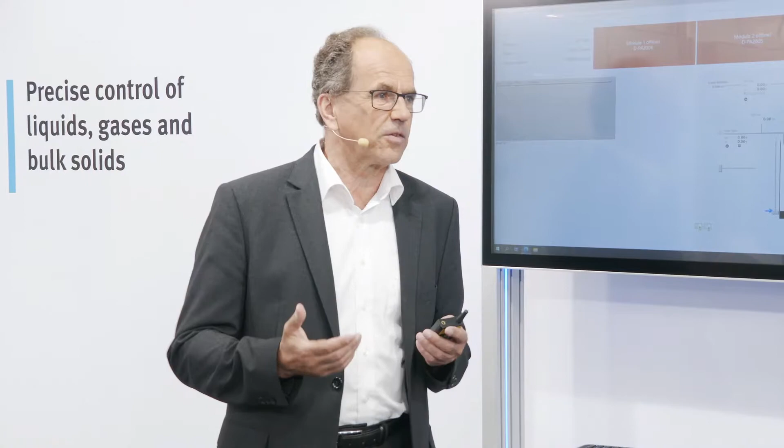Hello, Doro. A very important topic that we will talk about in the next 30 minutes, right? Yes, of course. What did you prepare? Just look at the discussion we have before the election here in Germany. You can see that this is an important topic: how to come to a climate-neutral living, let's say, to save our planet. Yes, very important topic. And we all have to take part. We all have to take action. Of course. We can't say the other one should do this. We all have to start at ourselves.

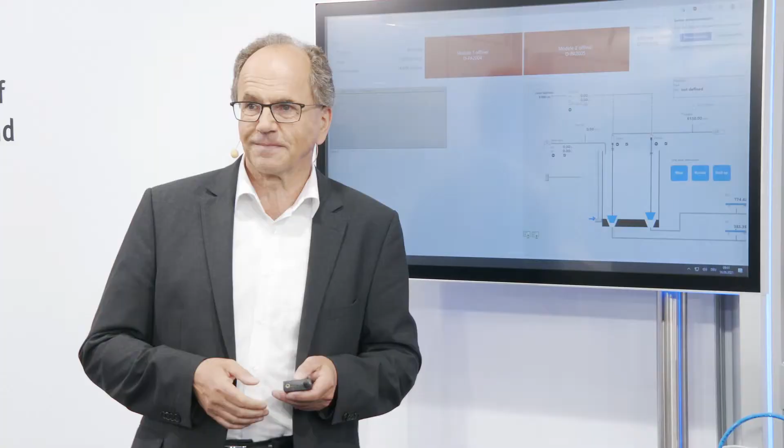So okay, let's go. Thank you for the kind introduction, Doro, and I would also like to welcome you to my presentation about climate-neutral production and what kind of benefits digitalization as well as automation can give on the road to this kind of production. But before I start, let's just have a look where we are. You see here statistics. You don't have to go into the details.

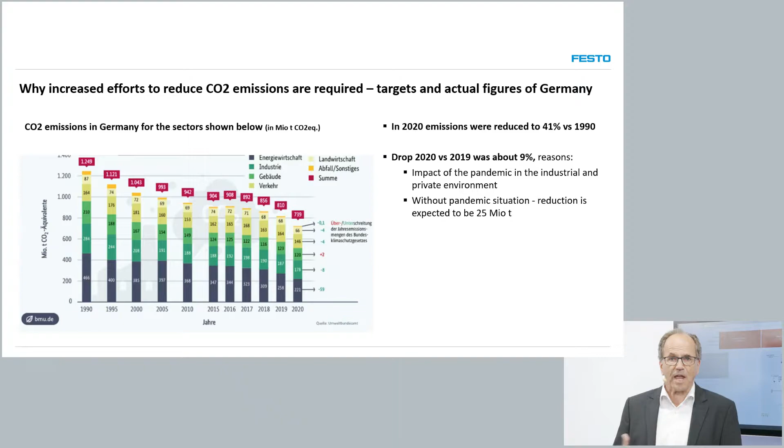The statistics about the climate-neutral, let's say, savings achieved from 1990 to 2020. This is a chart for Germany and an official chart from the Umweltbundesamt. The good news is that we achieved our targets last year. The bad news is that 9% of the reduction just comes from the year 2020. This means this is not really a sustainable reduction of CO2. And this leads to a change in the target setting.

I think you are very well aware that the European Union already strengthened the target for reduction to 2030 from -40% to -55%. And the German government also gave this target to the society, to come down from -55 in this case to -65%. Now you can say, okay, this is number crunching, but what is behind this? This means that from last year, 2020, to 2030, we have to reduce the CO2 emissions in the related sectors by 40%. So it's a huge amount for the industry, but also for energy production, for buildings and so on.

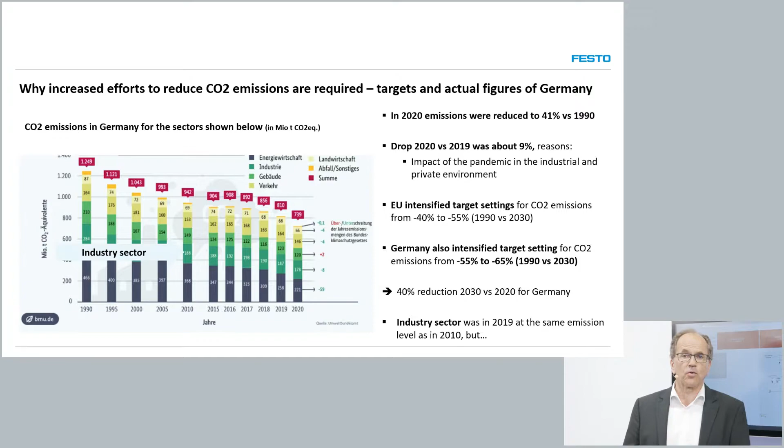And if you look at the industry sector, it was not so strong in reducing the CO2 emissions from 1990 to last year, especially from 2010 to 2019. As you can see here on the screen, there was nearly no reduction in the CO2 emissions. So we have to improve the situation, because the industry also has to contribute to this.

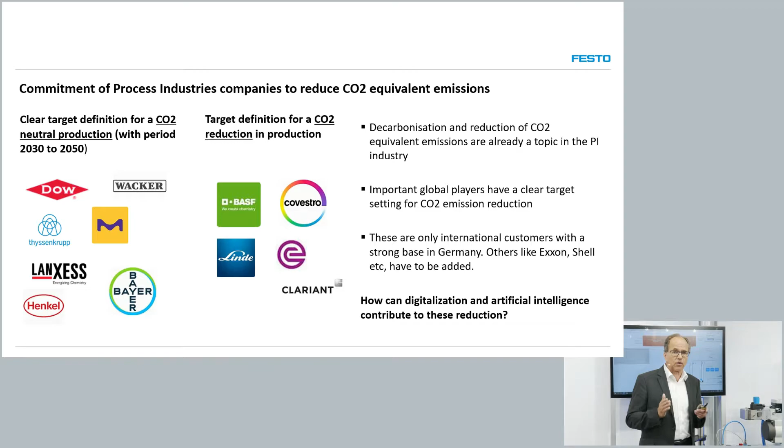And the good news is that a lot of companies, and I show a few examples on the left side of the slide, like Bayer, Dow, Merck, for example, already defined a year when they want to have a climate-neutral production within the period to 2050. Bayer, for example, announced 2030 as the year they want to have a climate-neutral production. The other companies mentioned here already have target settings for at least a certain percentage reduction in a certain predefined period. So we are on a good way looking at the industries.

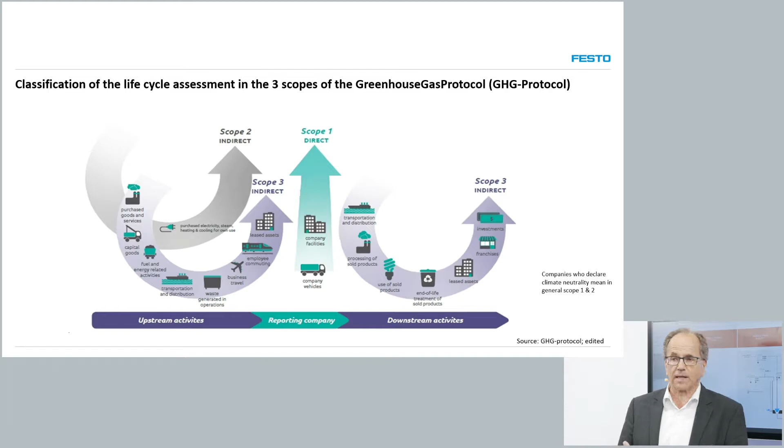Coming back to the left side means we have profiles, shafts and so on, which we import into our factory. We do the assembly and later on we shift it to the customers and users, operators for production. So when these parts arrive, they have already a global footprint of 20 kilograms CO2 equivalent. We add 2.15 kilograms on it, means in our own production facilities, we just add 10% to the overall already existing CO2 footprint of this product. Then we shift it to the operators for usage.

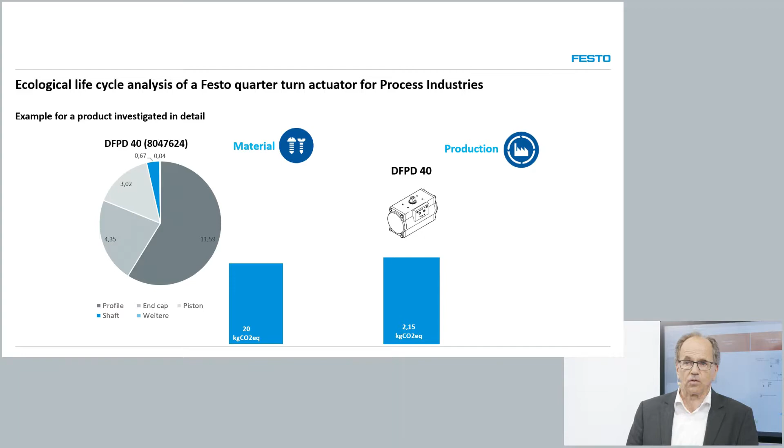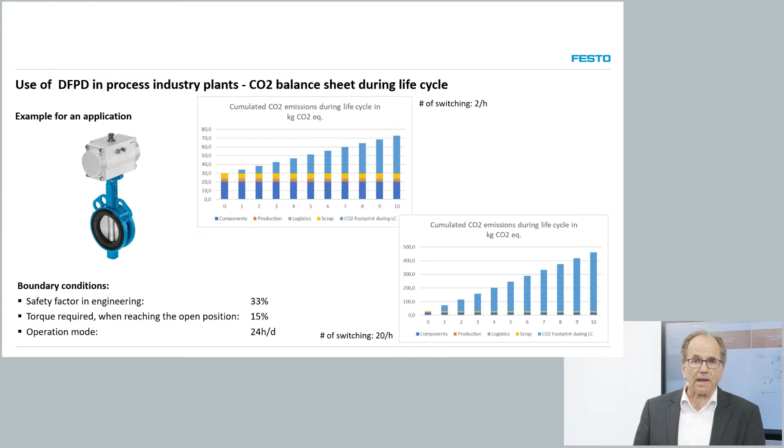When you only have 2 switching cycles per hour, then the CO2 footprint for the production still is a significant portion of the overall CO2 footprint if you look at the cumulated CO2 footprint for a life cycle of 10 years. But what can then automation contribute to reduce this? And I would like to show one example. And for this representation of the example, I will use this device. Everybody knows this device. This is a mobile phone.

You know Festo for a long period of time as supplier of pneumatics for decades. And also pneumatics is a very proven technology also for decades in automation of process plants. Now you can ask yourself, what the hell has pneumatics to do with digitalization? Very simple. We bring two worlds together, means mechanics as well as software. And we use the principle of the mobile phone. The principle of the mobile phone is that you have one hardware platform standardized, and the real functionality, and everybody is using different functionalities on the mobile phone, is implemented by installing apps.

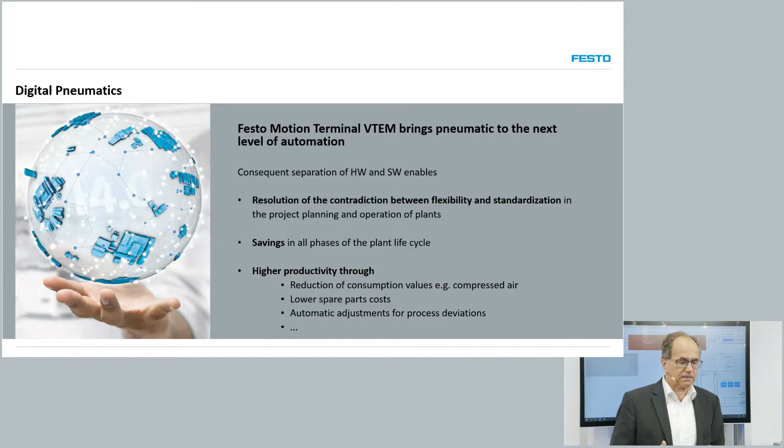So what we think is that by implementing this principle, we solved the usual contradiction between standardization as well as flexibility on the other side. Standardization, always you have benefits and have no flexibility in engineering and operation, and vice versa. If you have flexibility, then you usually have no standards and cannot achieve the benefits out of that. So we solved this usual contradiction, and I would like to give you one example which makes it very clear.

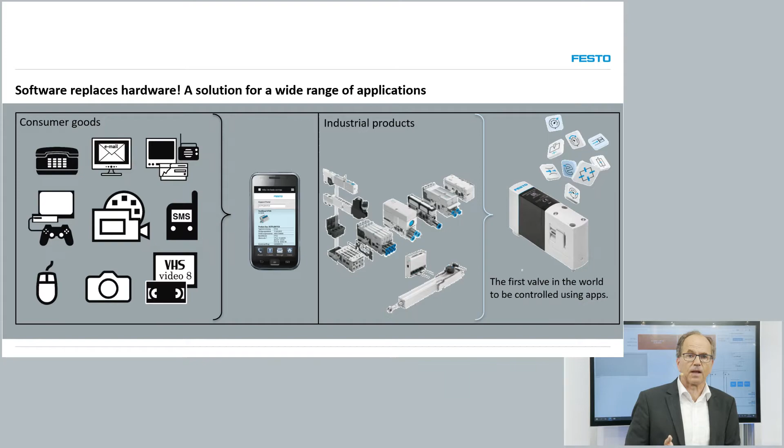And of course, looking at the maintenance, look at the spare parts on stock. You can imagine what kind of benefit you get. You have only one spare part in hardware on stock instead of all the other spare parts you can see on this slide. So this is already a clear benefit for this component. But what has this now to do with CO2? And I would like to encourage you in general to look how many apps are available. I would like to encourage you to discuss with us what are your problems, because our experience is also that in our discussions with customers we get new ideas for new apps.

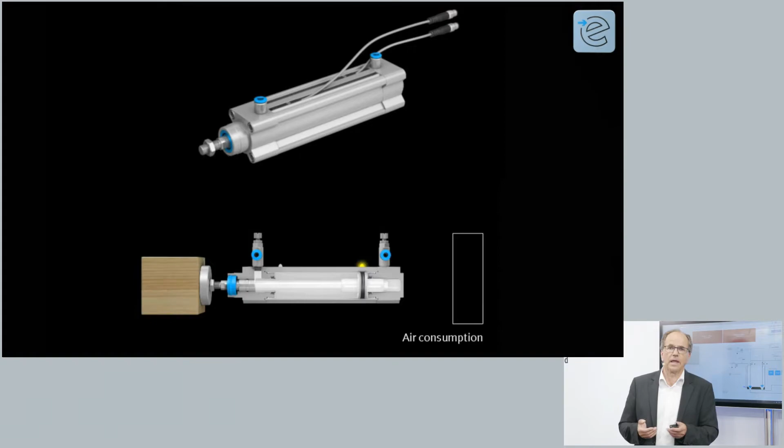But coming back to CO2 emission, I would like to use one video, and in this video you can see a linear actuator. He has to do some movement going back even with no load, and whenever he reaches the end position the chamber is filled up to 6 bar when the supply pressure is 6 bar.

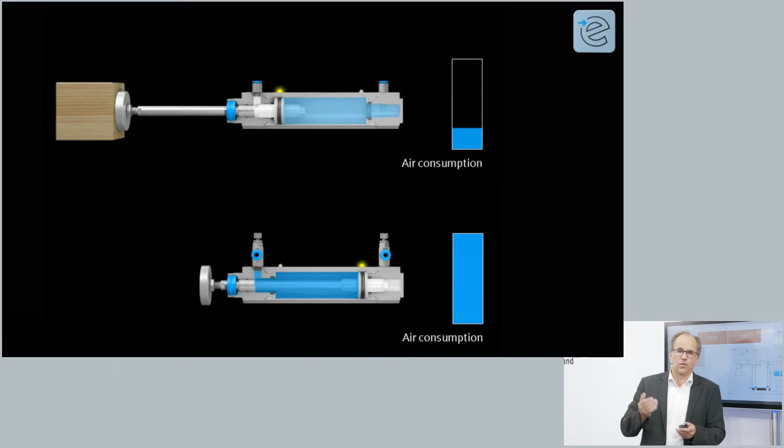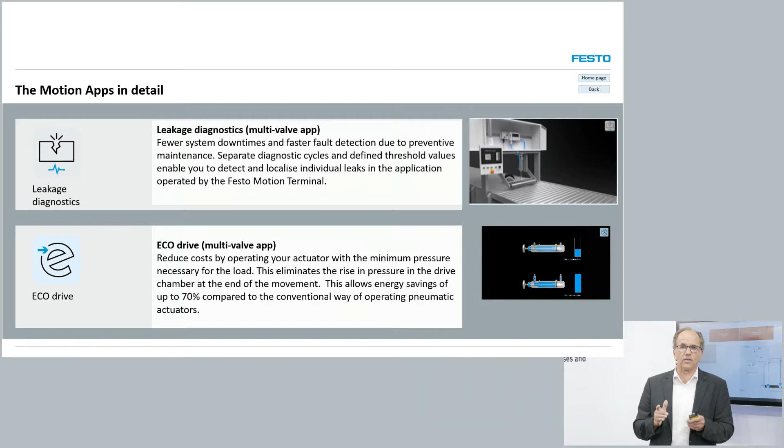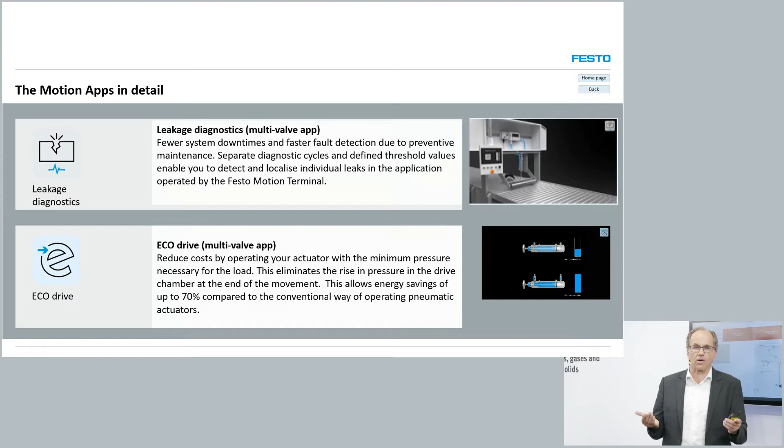Using the app in the example, the upper side, you can clearly see that reaching the end position, the chamber is not filled to 6 bar. So you save already a certain portion of compressed air, and you can still use, and this is a very important topic, the safety factor if required. So you have the advantage of having the safety factor available, but on the other side, save the compressed air when you use a safety factor, and everybody is using a safety factor in engineering.

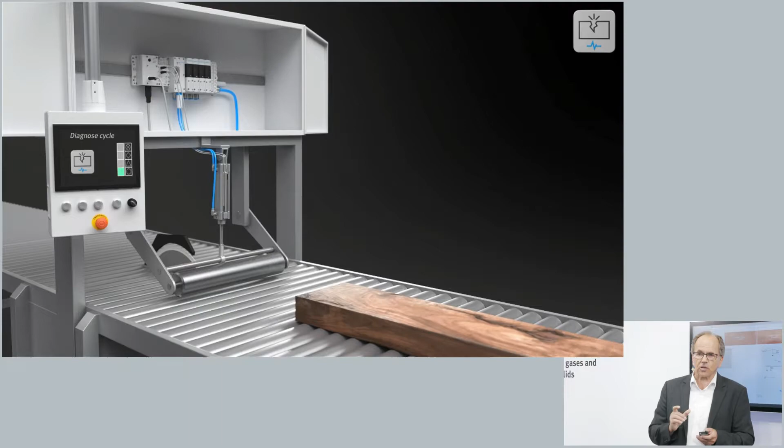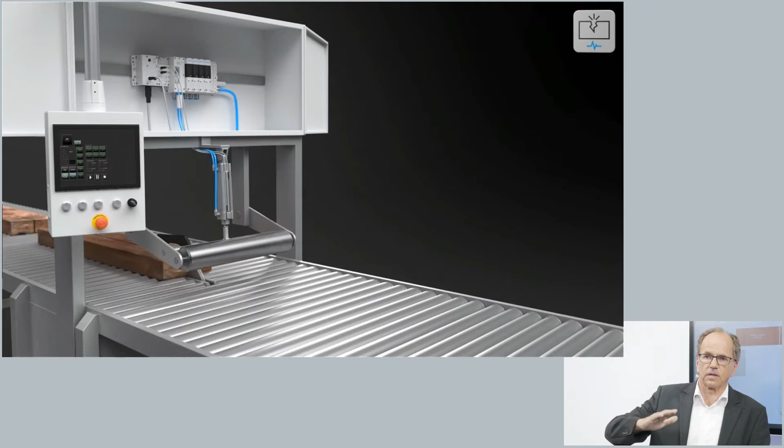A second app you can install in addition to this Eco app is an app testing leakages. You see here a device, for example, in a wood handling system. Doing operations means pressurizing the wood to the bottom. And after a predefined number of cycles, you can define a leakage test.

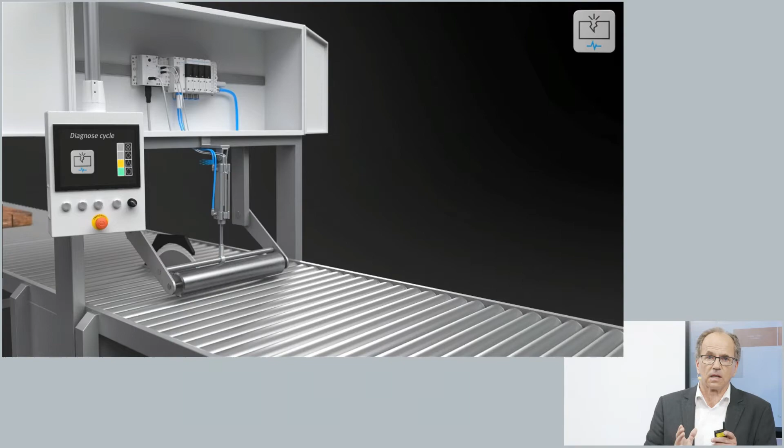And what is the advantage now? The advantage of this leakage test is that if you have a leakage, you get the information directly where the leakage is. So nobody has to run around and look where the leakage might be. So you save man hours for detecting the leakages, and also you can immediately start with fixing the leakages. So also big advantages when it comes to leakage detection. And of course, this is CO2 relevant.

I would like to come back to my example with the DFPD 40. I use the example on the left side, and I would like to compare now the footprint for the 20 cycle operation per hour. You can see here again on the slide, on the x-axis, the operation time in years, and you see year 0 is the footprint the product has just from the production. Cumulated, we end up with 461 kilogram after 10 years.

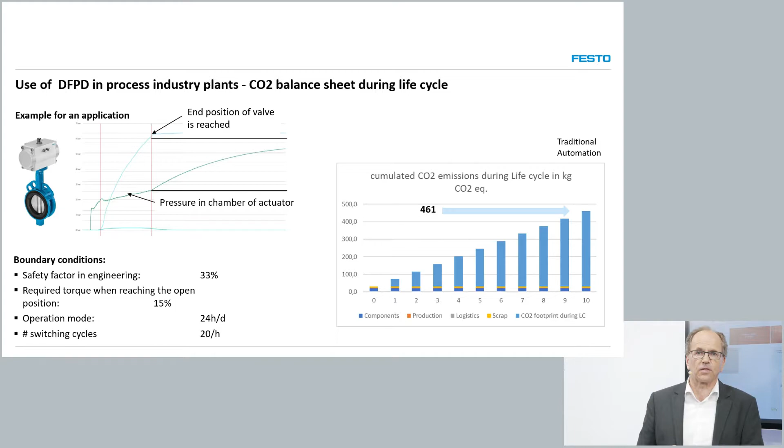And if you now use the motion terminal, this is then the second chart on the bottom, you end up with 216 kilogram. So you save, just by using the motion app, more than 50% of the CO2 footprint. And again, the Eco app, in addition with the leakage detection, is an additional benefit.

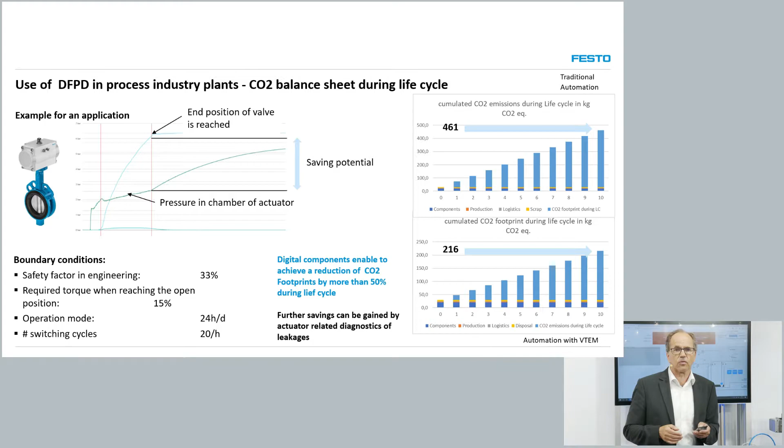Now we talk about CO2, but a lot of companies, of course, have to look for the ROI and for profitability. And what is behind now, looking at the profitability using this kind of equipment? What we also did is we calculated one rotary packer, in this case a cement bag filling unit, rotating with 12 filling stations. Each filling station is equipped with 3 pneumatic actuators.

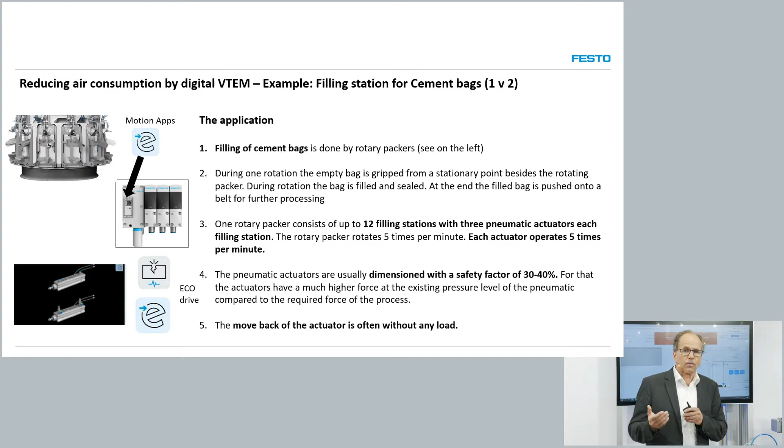And we compared, in this case, traditional automation, meaning linear actuators and single solenoid valves, to the motion terminal, the intelligent digitized component. And we calculated in this case a safety factor from 30 to 40%. Don't worry, you don't have to go through all the wording on this slide. Just please focus, because I would like to explain it on the chart on the left bottom.

You can see here a comparison of the investment costs and the life cycle costs for these two variants. Traditional automation on the left side in the chart, and the digitized motion terminal on the right side. And what you can clearly see is one thing: the investment costs are the blue part of the bar, and the green one is the consumed compressed air during a period of 20 years in this case.

Of course, the motion terminal is more expensive in the investment. In this case, you can see clearly, looking at the blue part of the bars, 20% more in investment. But during the life cycle, you have a lot of savings, and at the end, you have 1/3 of the net present value saved looking at a period of 20 years.

Okay, now, a few people say this is a long period, but we calculated it also, and I mentioned it here on the slide: after 5 years already, you have in the net present value a saving of 10%. So it's not always a question of the operation period of the plant. Still, you have the big savings. And I would like to emphasize one thing.

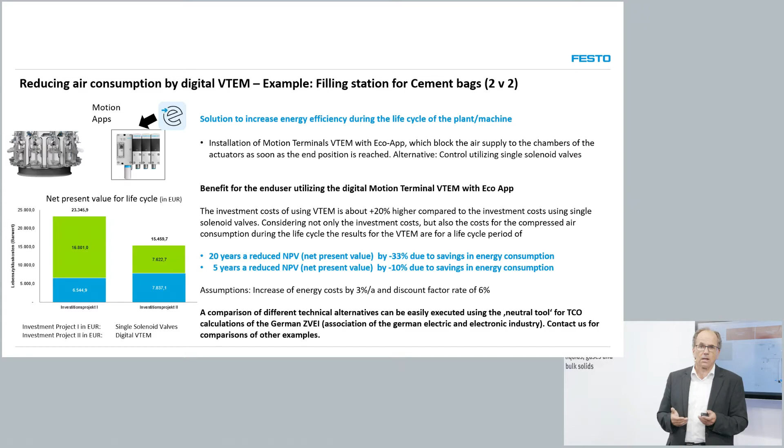This calculation was done with a, let's say, neutral tool from the ZVEI, the Association of the German Electrical and Electronic Industry. We developed this to compare alternatives with respect to life cycle costs. I would like to encourage you also to have a look at this web page, because you can download this tool free of charge.

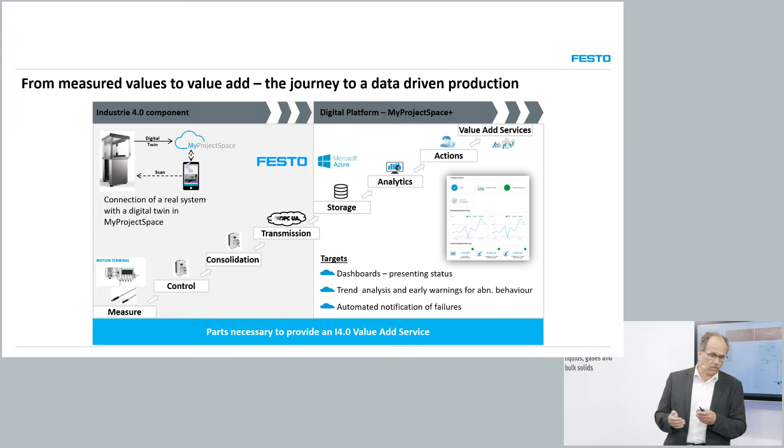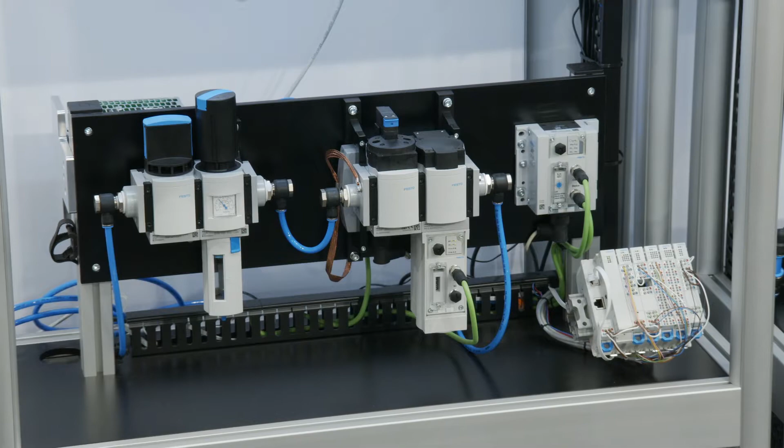Now, I explained possibilities on the shop floor, on the field level. Now I would like to step up the automation pyramid and go to the cloud level. Of course, field data are consolidated and then transmitted to the cloud. And I would like to use one example, and you can see the example here in this model plant, an air preparation unit. An intelligent air preparation unit with connectivity to the cloud, also shown here.

And what is special, or what can you achieve? Customers, operators in Germany use this intelligent air preparation unit in connectivity with the cloud application to monitor the consumption of compressed air. This not only for one production line on their side, but for 3 production lines. So they can also then benchmark one production line to the other, and can get, let's say, a best of class production line on the site.

They also would like to extend this, of course, on a global base, because you can easily then also benchmark air consumption in the production line in Brazil, with India, with Germany. Why I emphasize this case? Because these kind of application, just taking the old air preparation unit out and bringing an intelligent one in and analyzing data in the cloud, gives you a very easy way to learn and get first steps of experience in digitalization if you do not have these kind of expertise up to now.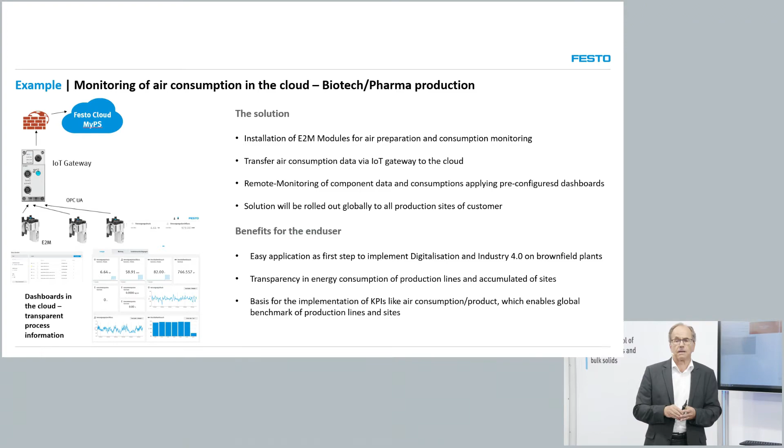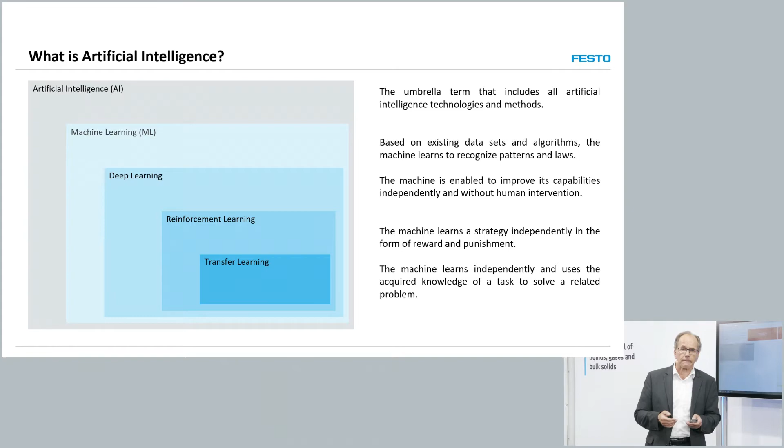Because there is no risk for the production. No risk for the production, but you can easily take these kind of applications to get the first steps and experiences. The second example I would like to show is artificial intelligence. And here I would like to focus on machine learning tools. Machine learning tools you can install on edge or in the cloud.

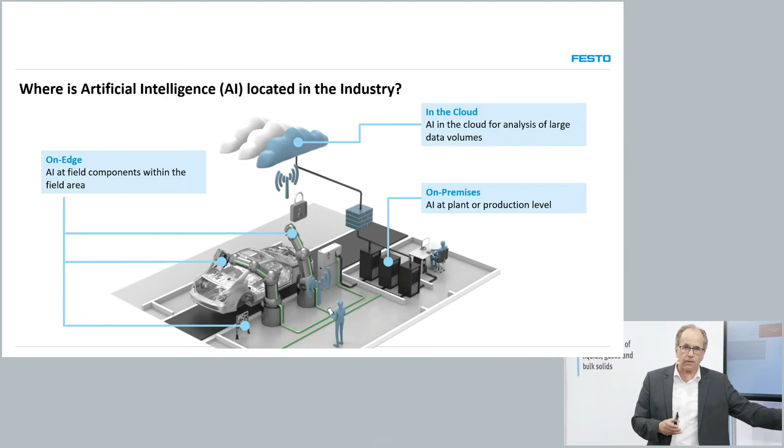You remember the air preparation unit and analysis of different consumptions in Brazil, India, as well as Germany. This, of course, makes sense to install these kind of analysis tools in the cloud. But if you want to analyze a production step, then it makes sense to have this installation done on edge. I explained yesterday how you can do it using another example. I will not go into this example today due to time reasons, but I would like to show another example out of the automotive industry. But this is not related only to the automotive industry. You can transfer these easily also to the bulk handling, because we have similar or the same discussions, I have to say, also with bulk handling customers.

You see here a production unit, a welding process. Two parts come together in one location, are fixed by 9 pneumatic actuators. Then the welding process is done, and then the welded part is taken away. Next two parts come, are fixed, and so on. This is done on a frequency of 1.5 minutes. So a very fast process in the automotive industry, and you can imagine if you have a failure, if you have to repair one of these actuators, you have loss of productivity immediately. Someone has to go, someone has to exchange the actuator, and so on.

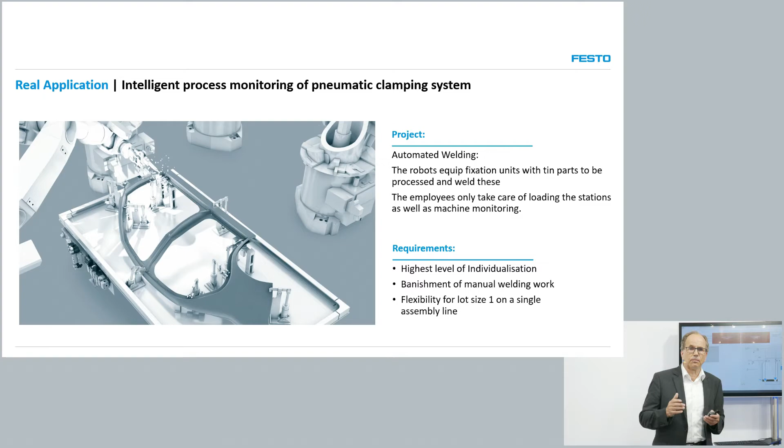So what we did is we installed on edge also these kind of machine learning tools, and we simulated failures which occur in these kind of applications. Means leakages, means friction, as well as changes in the supply pressure. And what you can see here is two things. First of all, machine learning tools train themselves. There is no programming effort, they train themselves to analyze and to monitor the process. And then they get a set of healthy data representing the process. Then, of course, they can easily detect abnormal behavior because then there is a change in the process.

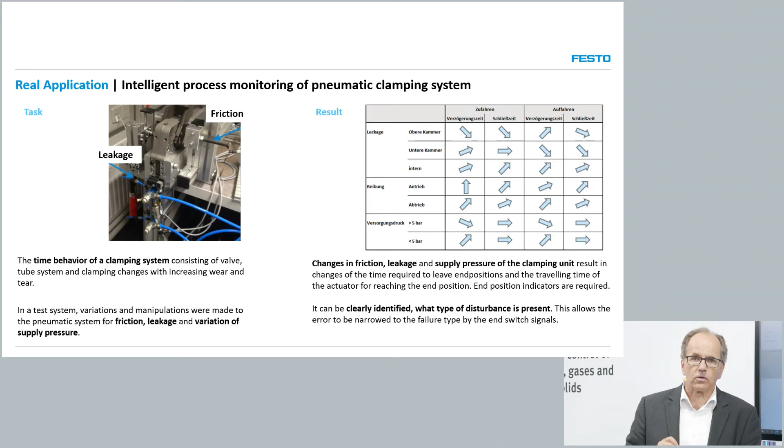And then looking at the errors, you can see here, they can not only detect anomalies in the process, but also get first indications what might have happened in the process. We monitored in this case the time period between the electrical energization of the solenoid valve and the actuator leaving the end position and the actuator reaching the other end position. These are two sets of data, and also vice versa. And you can clearly see the change of the arrow already indicates what the problem might be. So machine learning tools give you not only the advantage that they detect abnormal behavior, but also to show what could be the reason for that.

So we clearly say these kind of tools will improve the production tremendously, because they can avoid shutdowns, unplanned shutdowns, and we can shift maintenance in planned maintenance shutdowns. So we are pretty sure that we can detect, for example, these kind of failures, increasing friction, 7, 10, 14 days before we really might have a problem. And this is, from our point of view, a strong basis also for the implementation of predictive maintenance concepts.

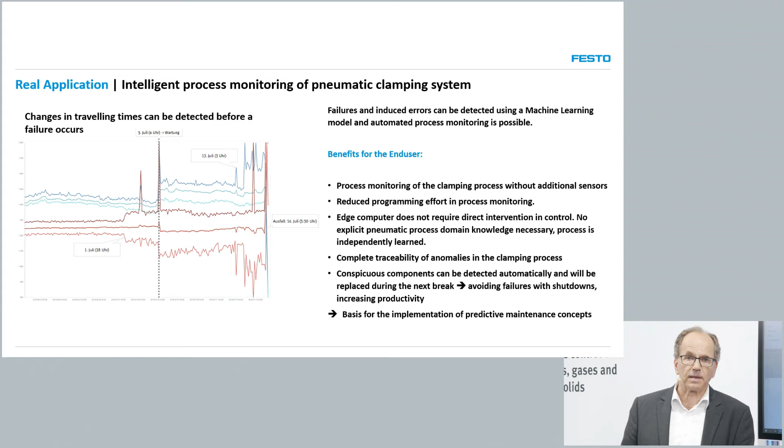The last topic I would like to show is Festo Energy Saving Services. Of course, we can consult your installation with pneumatics, give you recommendations how to improve, but also in the design phase, in the engineering phase, we can give you recommendations and hints how to improve it. I will only show a short video of roughly 1 minute, and then you can see what, especially also for brownfield, but also for greenfield plants, we can deliver.

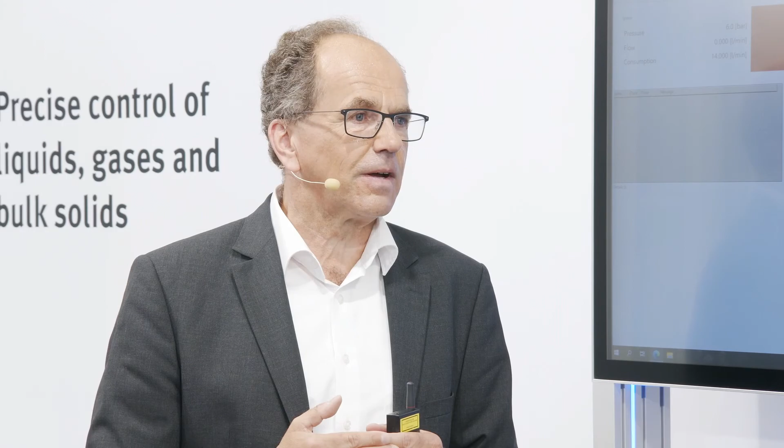There is one more question. This is interesting because in Germany we have a discussion now, especially before the elections, about this topic. And we discuss exactly in ZVEI, for example, the Association of the Industry, what we can improve to get this done. And this and other topics are part of this discussion. We have to get in action. Yes, something has to happen. What are the obstacles for the CO2 reduction, and how can we overcome these obstacles?

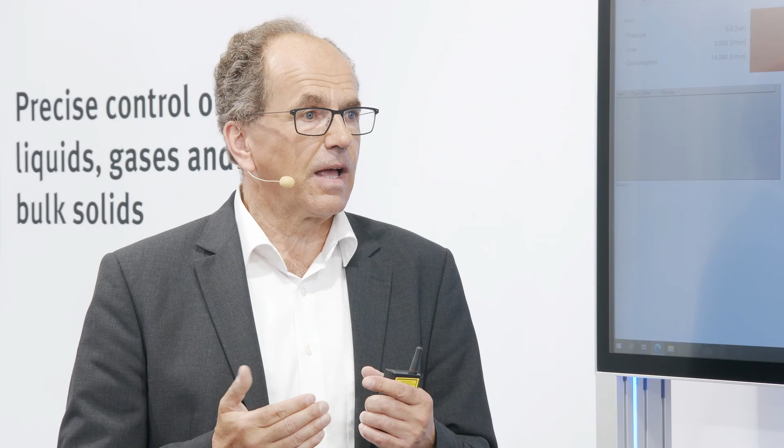Yeah, this is mainly what I mentioned already. We have to give, let's say, better chances to that. For example, total cost of ownership. There is a huge discussion. What period has to be considered when we talk about total cost of ownership? Do we have to consider 5 years of operation, or do we have to consider, for example, the technical lifetime of a product? So depending on these different criteria, we have totally different evaluations of the return on investment.